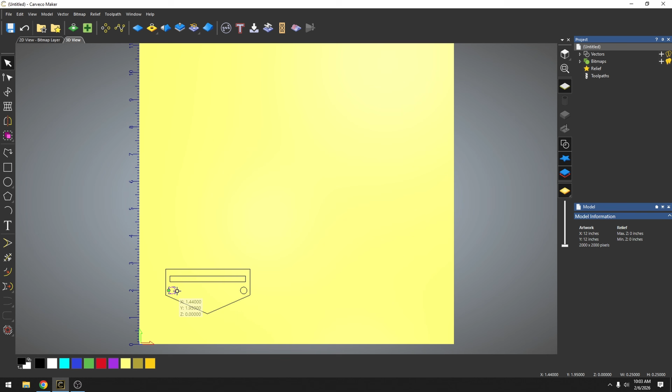In this hack, we're going to go over how to use layers to make your machining more effective. I have a part that needs a bunch of copies, but there are a couple of different operations. It has some holes that need to be drilled, a slot that needs to be cut, and then the part needs to be cut out, and I need about 20 of these. So I wanted to show you a quick and efficient way to organize this in layers that'll make creating and toolpathing this much easier.

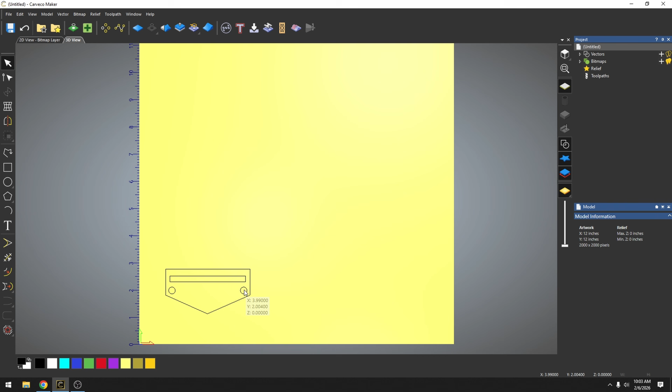The first thing we're going to do is take each component and move it to its own layer. I'll highlight my two holes here and move them to a new layer. We're going to name this layer holes. Up here in the vector layers, you can see I now have that new layer called holes. Let's click back on our default layer.

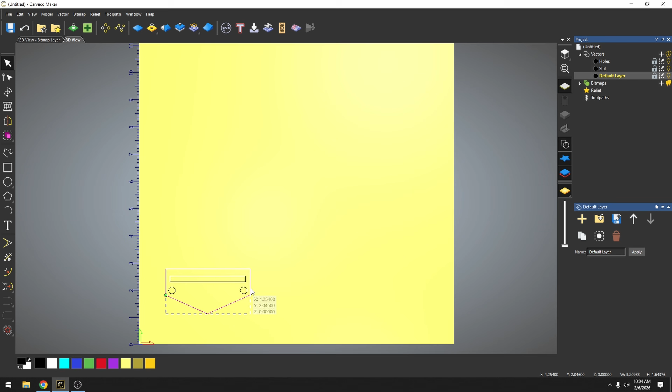Now we're going to click on the slot and move that slot to a new layer. We'll call it slot. Go back to my default layer. And on this last border vector, we'll also put it on another layer, and we'll call this outside vector.

Now I want to make copies of all my parts. I'm going to select this as a whole and use our block and rotate copy tool. First I want to move this down to the corner, giving it a little space, then open up our block and rotate copy tool. I want to set my gaps.

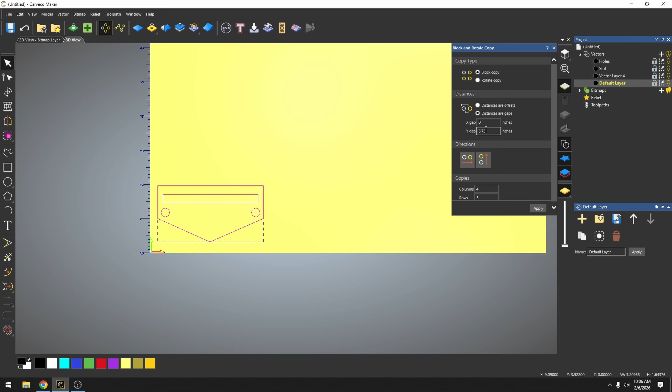We're going to put a half inch in between the X and the Y, so there's a half inch between each part. I'm going to try to get 4 columns and 5 rows. Let's see what that does. It looks like I can't fit these all on the same sheet, so I want to expand the length of this wood.

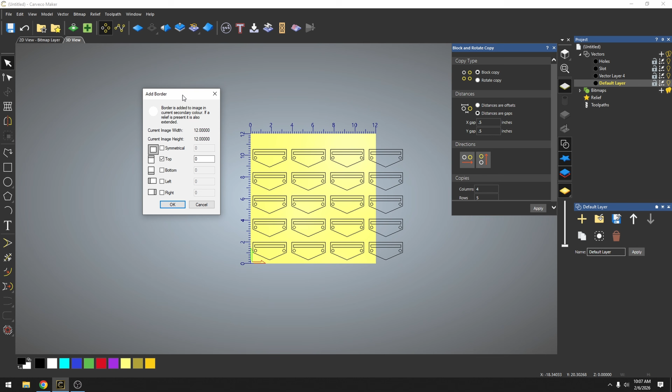I'm going to go back up here to model and add border. I'll uncheck symmetrical because I'm just adding it to the top, and let's give it another foot, so 12 inches. We've added another foot to the top of our material.

Let's redo this block and rotate copy. Let's do 3 columns and 7 rows. That's a little more than the 20 I need, so I can get rid of these two since I only needed 20 parts.

And this is where the layers are really going to help us out. All I'm going to do is go to my toolpathing, and the first thing I want is an area clearance for all of the slots in this part. So we're going to go to area clearance, and instead of using selected vector, we'll simply move down and use that slot layer.

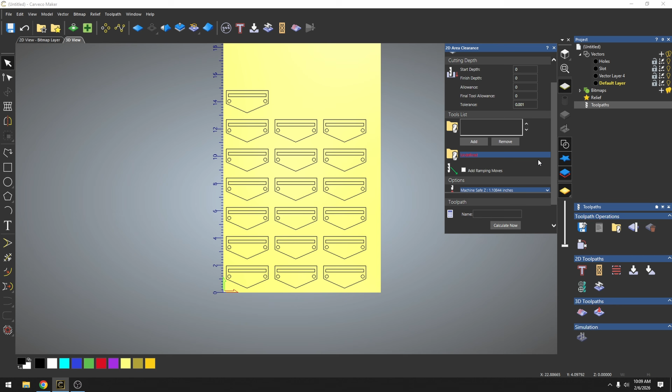Now I need to set up my material, let's say it's 1 inch thick, and I'll make the finish depth 1 inch because we want to go all the way through for the slot. We'll add a bit, using a 1/8 inch down cut. When I calculate that, notice I didn't have to select any vectors, because I'm using that layer, it went in and cut all of those slots without having to click and select each one.

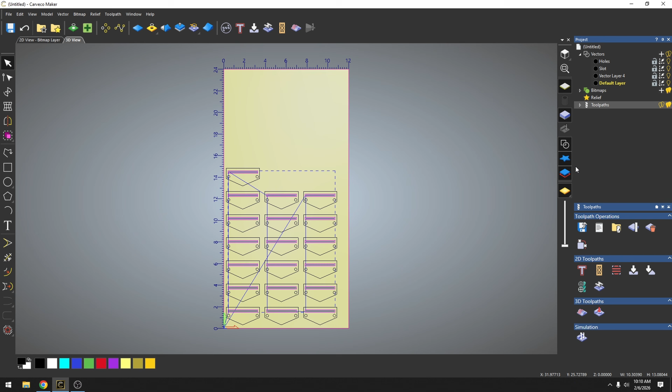We can do the same thing with our drilling toolpath for the holes. I'd also do an area clearance with those, just using selected vector, going with holes. Again we could do our finish depth of 1 inch, use a 1/8 inch bit, and calculate. And again, because we're using that holes layer, we didn't have to go in and click on all of the holes.

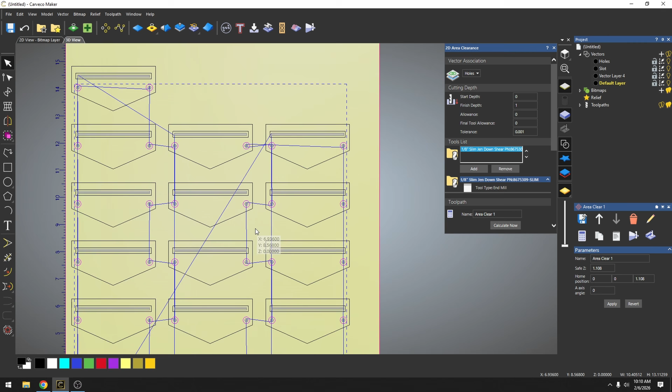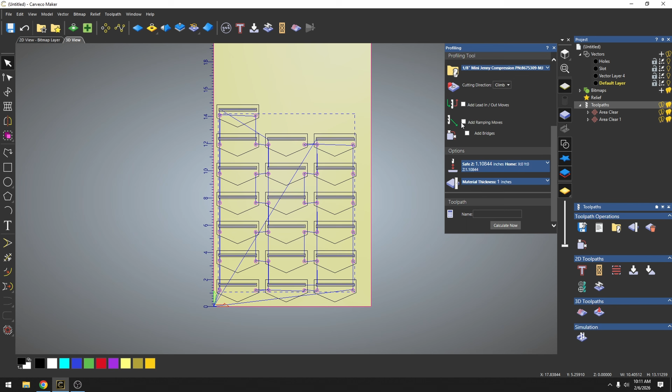So this makes it really simple and easy to do a large project where you've got a lot of pieces to cut out, but you only have to select the layer instead of going through and selecting all of those vectors, and this will save you a ton of time. We'll finish this out, calculate now, and there you have it, guys. We quickly cut out a bunch of parts, and we didn't have to sit around and select a bunch of vectors to do it. We just used our layering to select our toolpathing.

Hopefully this little trick will help your efficiency in toolpathing.